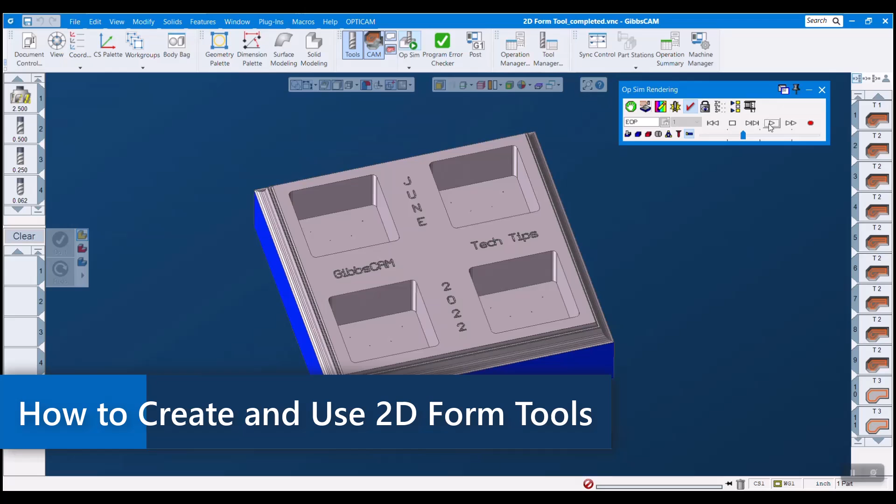Form tools are sometimes a necessary part of programming when you are using unconventional tools. Recent enhancements made to GibbsCAM make creating, using, and simulating these tools better than ever. Today, I'm going to show you how to import a DXF, make a 2D form tool from it, and use it in a contour operation.

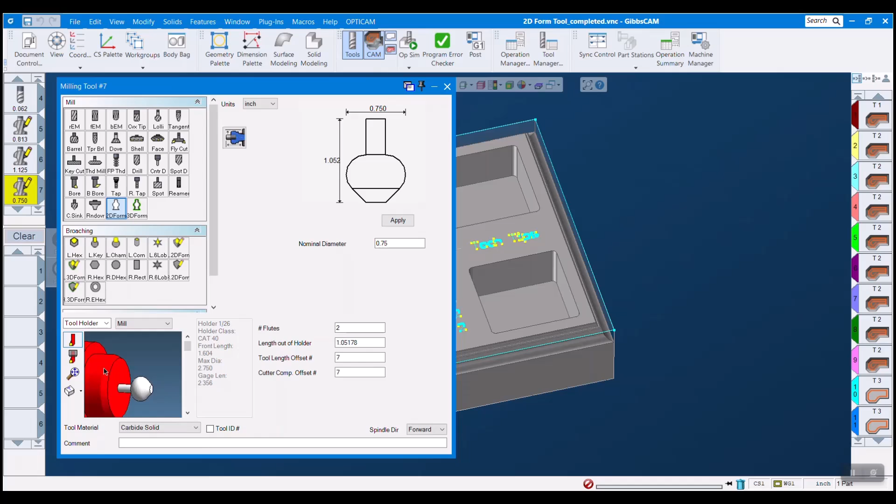So the first thing we want to do is go to File, Import. I want to select my DXF. DXFs are drawing file formats that only use two dimensions, X and Y. You can typically download these from the manufacturer's website for precisely this reason.

Once I import this, it actually comes in gray. The reason for that is it's making a work group for our DXF layer. You can see that when I open my work group menu here, and when I select a DXF work group, it turns blue, right?

So there are three rules that your tool geometry needs to follow for 2D form tool creation to work. The first rule is that it needs to be in the XY plane. I think when you import things from drawing files, they typically come in the XY plane, so this isn't too much of an issue. However, it is still necessary for this to work.

The second rule is the tip of our tool here must be at 0, 0, 0 of our original coordinate system. So how we do that is we just double click this to chain select it, and we can go to Modify, Absolute Translate, and I'm going to click in here and hold down Alt and Shift on my keyboard. When I do that, it turns to a square, and what we're doing is grabbing values from the model to put into this dialog box.

So Alt and Shift on the tip of our tool fills in the XYZ coordinates of our tool, right? And I want to move it to 0, 0, 0. So I hit do it, and we see that it jumps right over.

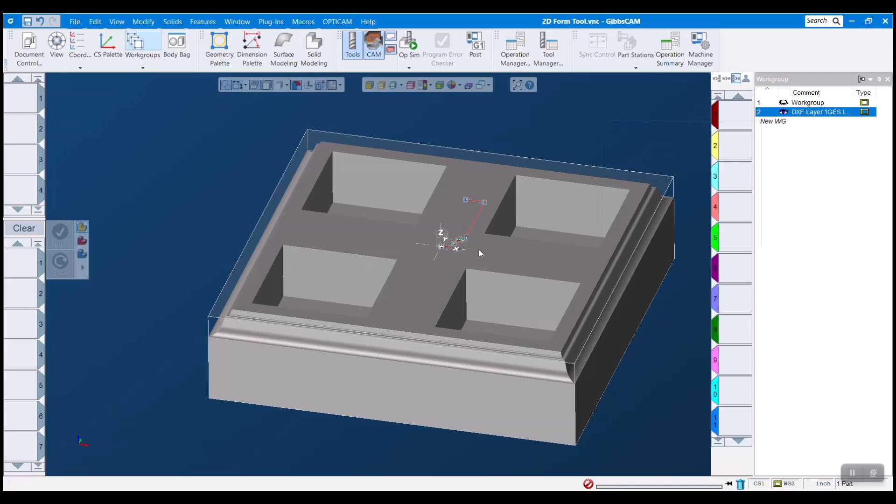So now I still have my geometry highlighted. We can double click on a blank tool tile, and 2D form tool is down here at the bottom. Then I want to come over here and hit apply, and you'll see it load in here, not only up here, but down here.

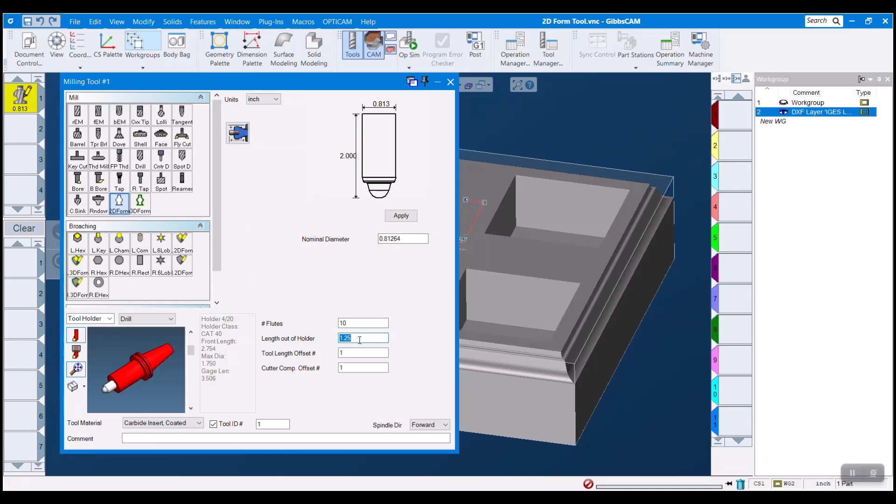We can select a holder. We can tell it how far out of the holder it is, all the things we can do with normal tools. So that's all standard behavior. That's how we create our 2D form tool.

Let's make a quick operation with it. So I'm going to jump off of that work group back to our original work group and close out that menu. Let's drag this down and make a contour. And I'm not going to dwell too much on this. I just want you to see our tool in action.

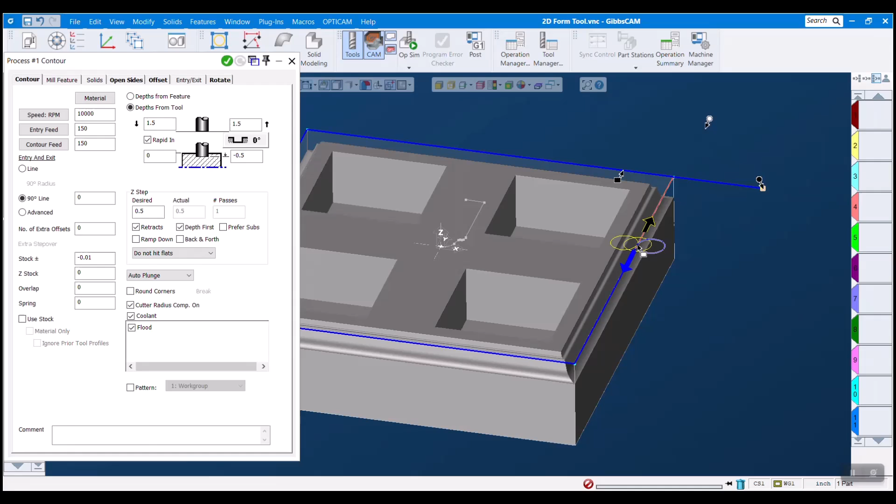Start off our part. Recent enhancements to simulation allow GibbsCAM to accurately simulate all kinds of form tools now, even in multitask machining and 5-axis machining environments. That really takes our form tools up a notch here in terms of usability and viability.

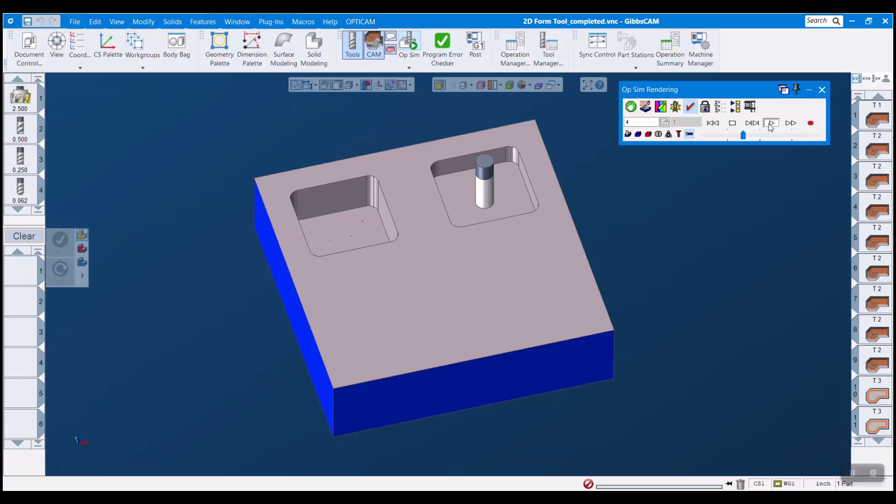2D form tools can sometimes be powerful allies when trying to machine difficult features. Now that simulation of these tools has been enhanced, using these is an integral part of many programmers' routines. I hope that this tech tip has helped you see that form tool creation can be quick and easy, and that it is not something that needs to be shied away from.